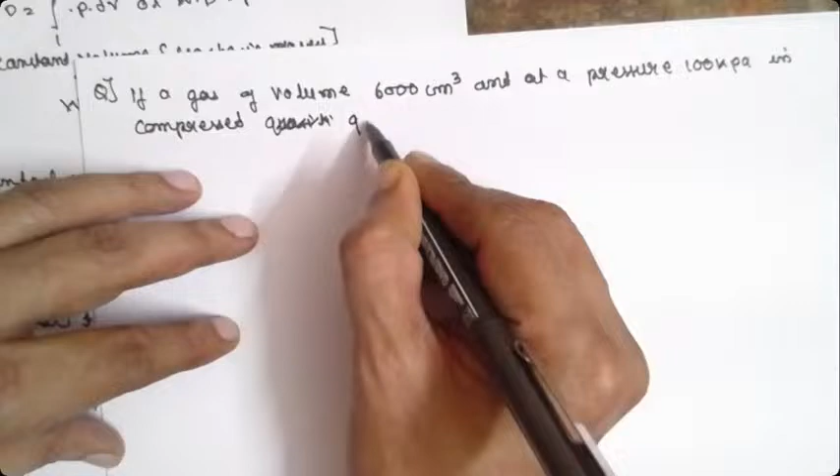If a gas of volume 6000 centimeter cube at a pressure of 100 kilopascal is compressed quasi-statically, it is the name of the process.

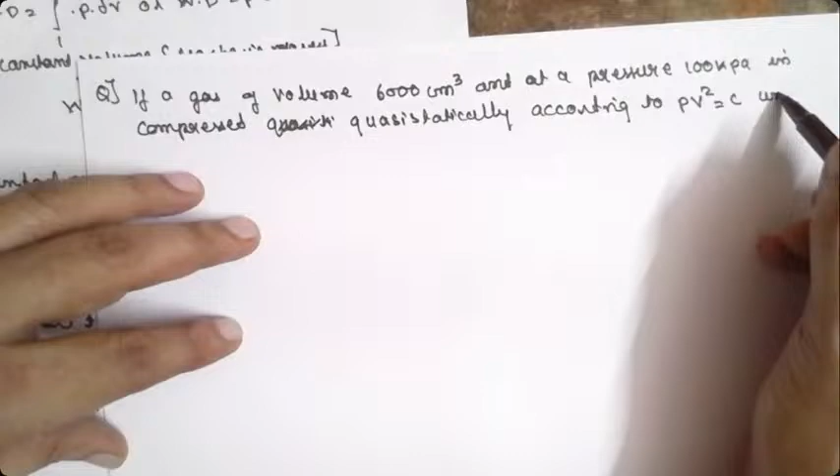According to PV square is equal to C, until the volume becomes 2000 centimeter cube.

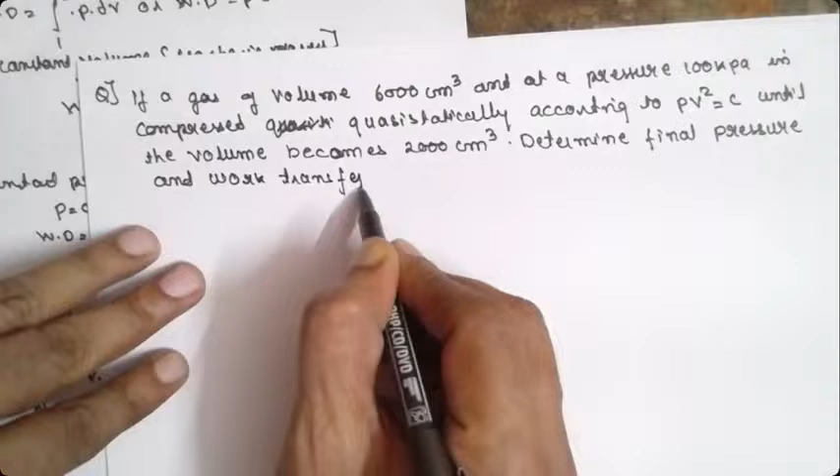Determine final pressure and work transfer. This is from July August 2022, for 6 marks. Now, based upon the overview of the problem...

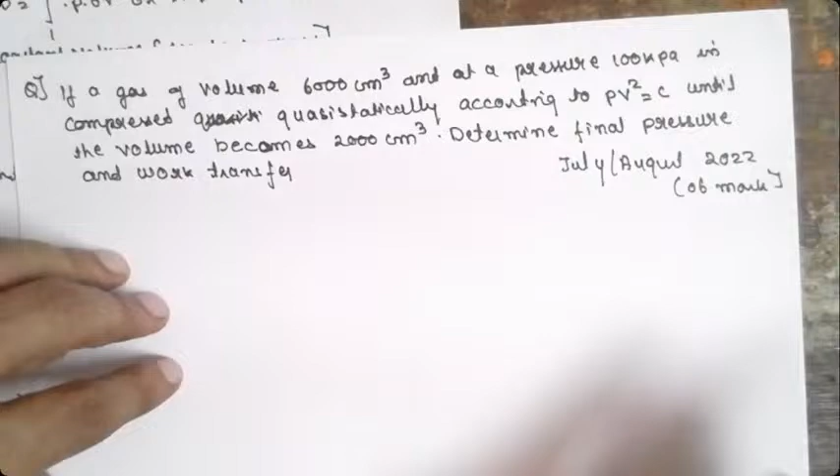Which process does this indicate? If it is PV square is equal to C, does it indicate constant pressure, constant volume, constant temperature, polytropic or adiabatic process? It is polytropic. This indicates a polytropic process.

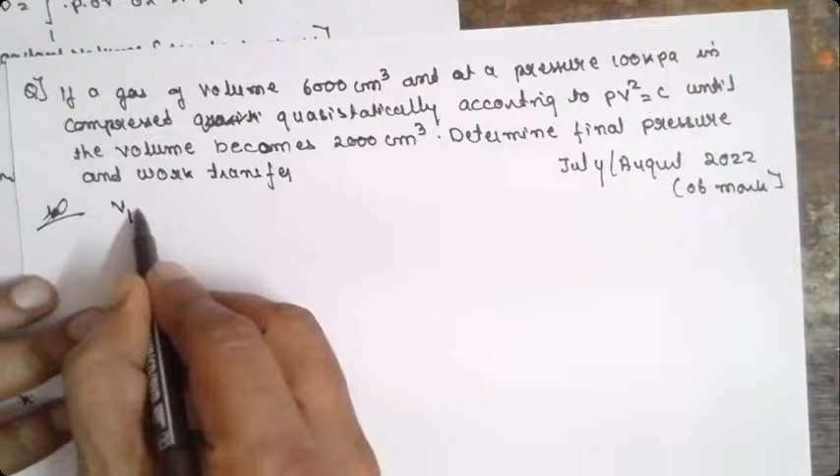Next, the volumes are given in centimeter cube, convert them to meter cube. It is a polytropic process based on this. Here V1 is 6000 centimeter cube, which has to be converted to meter cube.

So we go for 6000 into 10 raised to minus 6, converting centimeter cube, giving 0.006 meter cube. Next, V2 is 2000 centimeter cube multiplied by 10 raised to minus 6, which becomes 0.002 meter cube.

And the pressure given is P1, which is 100 kilopascal. That means they have given the P1 value. We need to determine the P2 value.

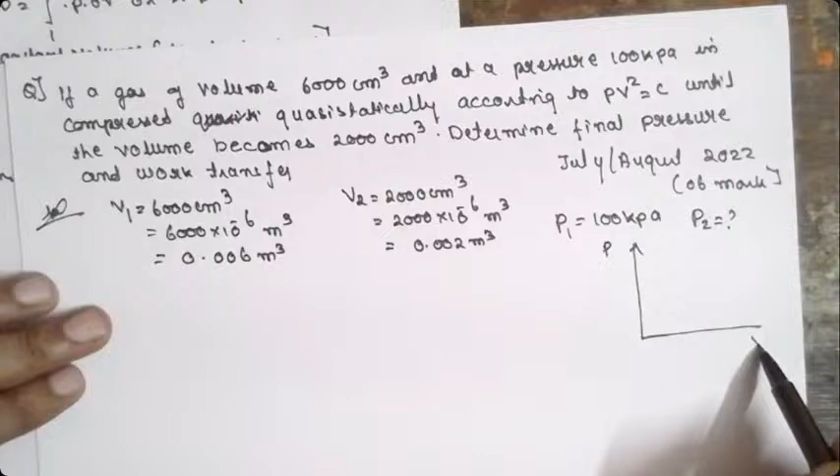It is a polytropic process. The PV diagram for a polytropic process will look like this, with points 1 and 2. PV square is equal to C. Now we need to find the pressure P2.

From the polytropic process, we know that PV^n is equal to C. It is similar to P1 V1 square is equal to P2 V2 square, equal to C.

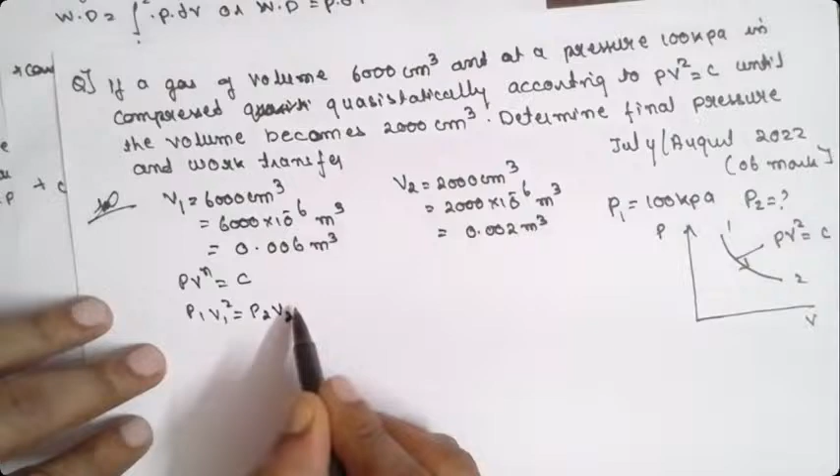Now we need to find the P2 value. We can write P1 (V1 divided by V2) whole square is equal to P2. Substitute the values: P1 is 100, V1 is 0.006, and V2 is 0.002, whole square, is equal to P2.

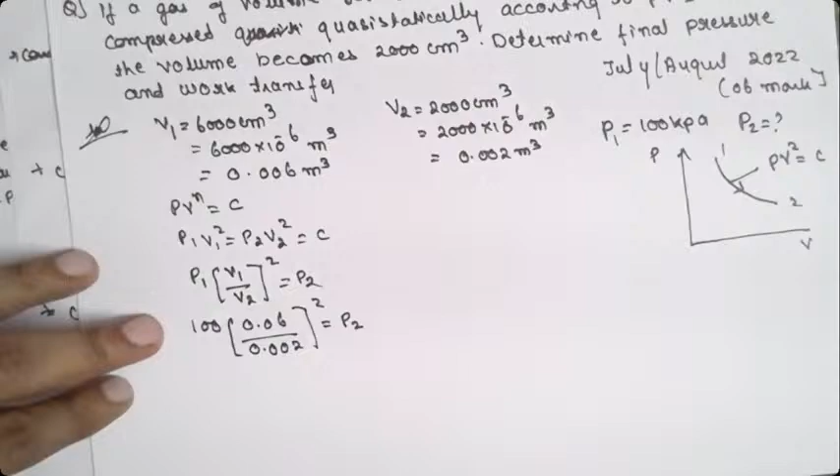Now 100 into 0.006 divided by 0.002, bracket close, square. The answer is 900. The P2 value is 900 kilopascal. We have determined the final pressure.

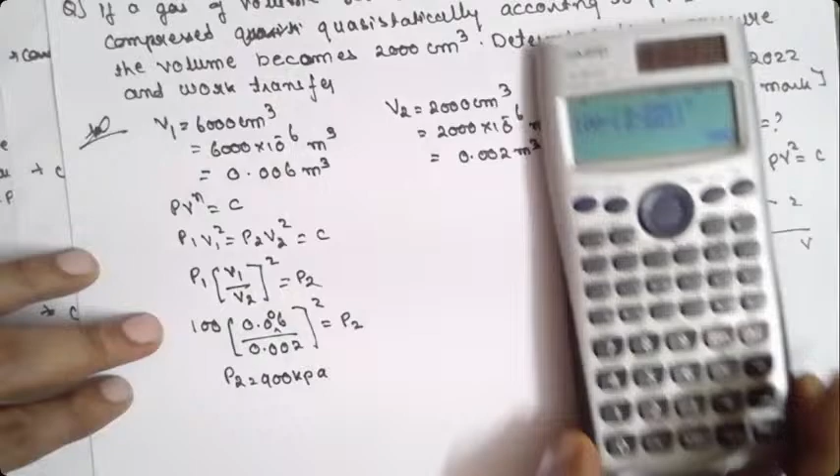We need to find the work transfer. What is the formula for work transfer in case of a polytropic process? Can anyone tell? W is equal to P1 V1 minus P2 V2 divided by n minus 1.

Excellent, n minus 1. Now what is the value of n here? The value for n will be 2. Substitute and you will get the work done.

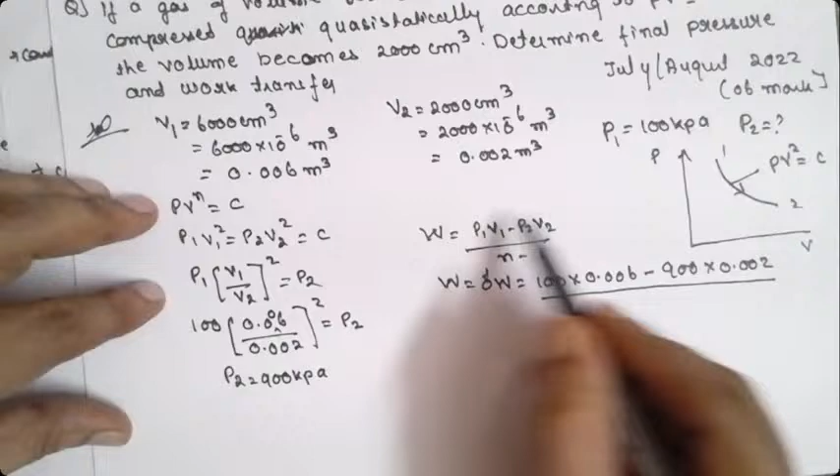Substitute: 100 into volume 0.006, P2 is 900, V2 is 0.002, divided by n minus 1, which is 2 minus 1. Now substitute: 100 into 0.006 minus 900 into 0.002, divided by 2 minus 1.

The answer is W, or delta W, is equal to minus 1.2 kilojoule. Here minus indicates heat is absorbed by the system.

Negative indicates work absorbing system, not the heat - it is a work absorbing system. Negative indicates the work absorbing system.

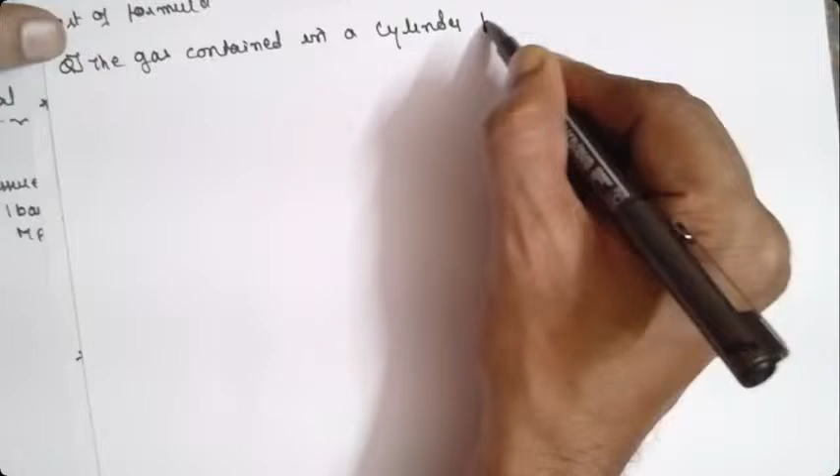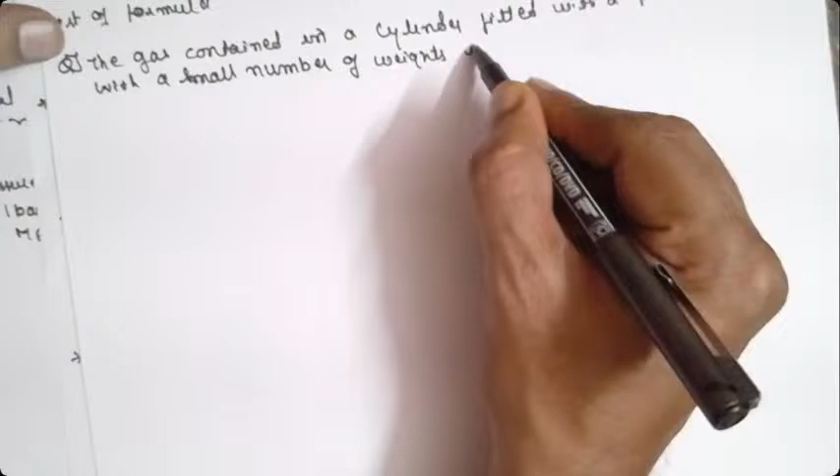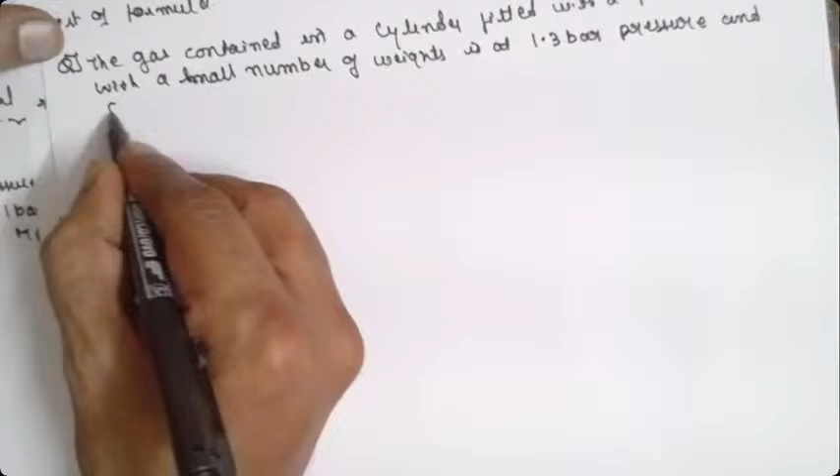The gas contained in a cylinder fitted with a piston loaded with a small number of weights is at 1.3 bar pressure and 0.03 meter cube volume.

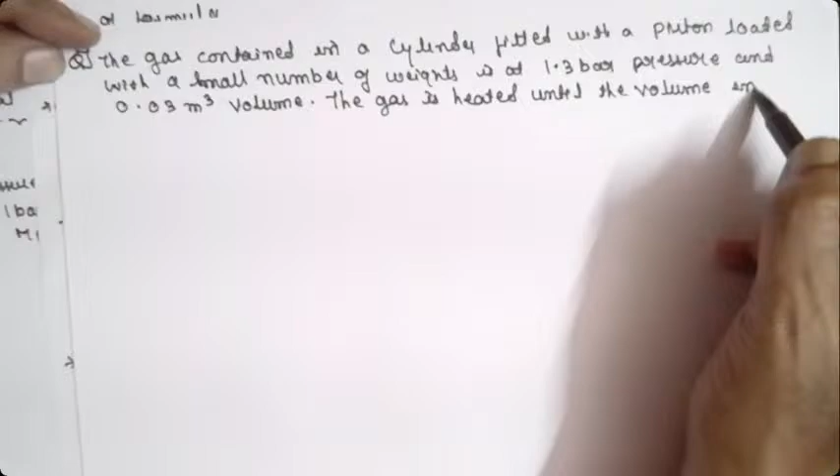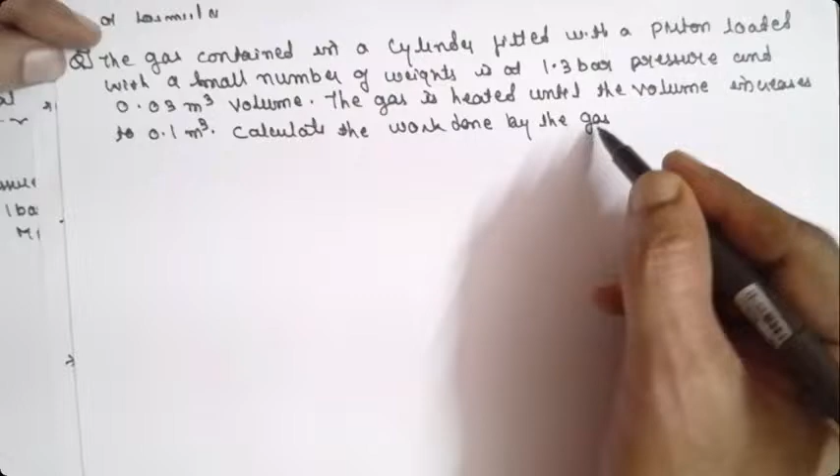The gas is heated until the volume increases to 0.1 meter cube. Calculate the work done by the gas in the following process.

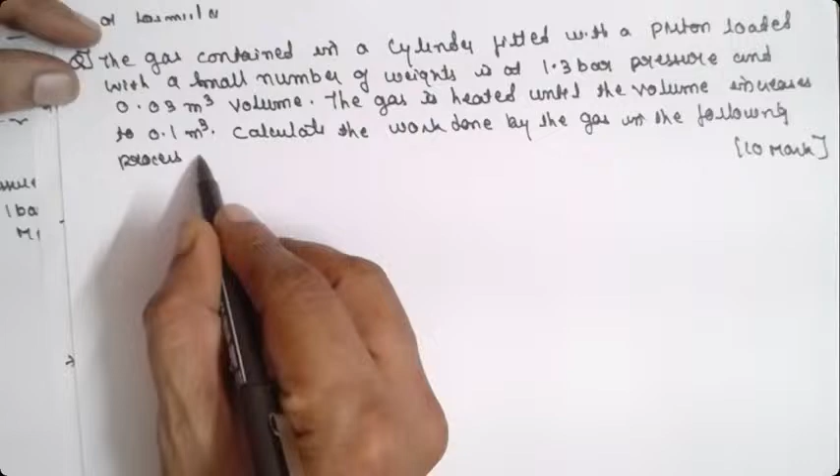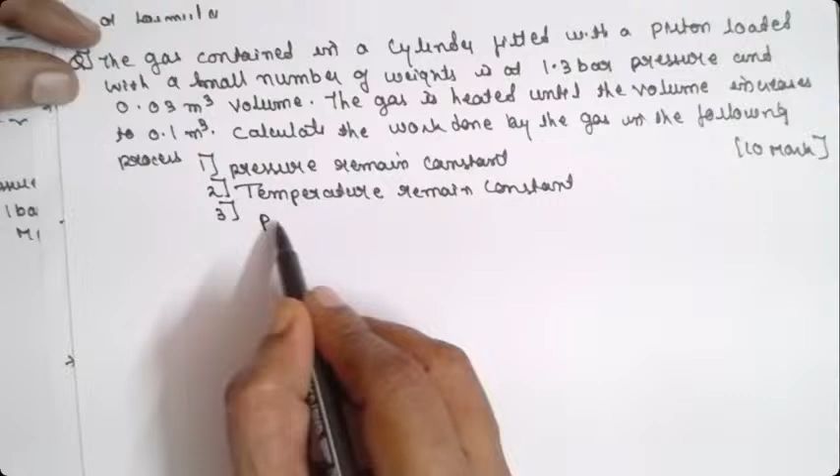This is for 10 marks. First, when the pressure remains constant. Second, when the temperature remains constant. Third, when PV raised to 1.3 is equal to C during the process.

During the process, we have to find out the work done with respect to pressure remains constant, temperature remains constant, and PV raised to 1.3 is equal to C.

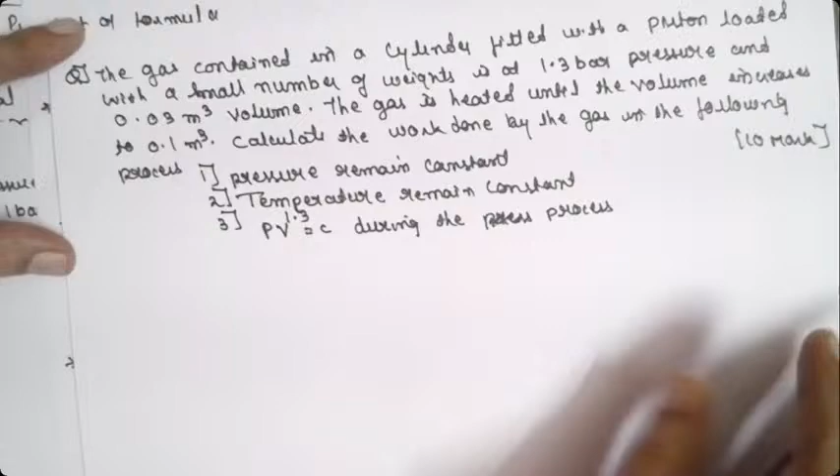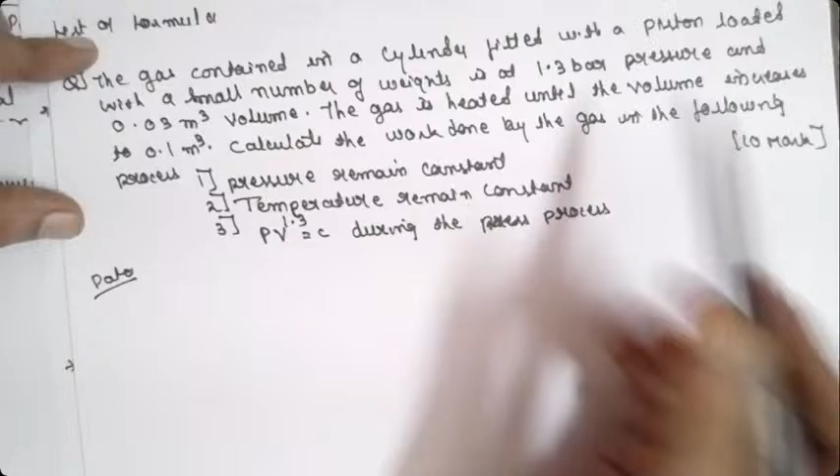Given data: the gas contained in a cylinder fitted with a piston loaded with a small weight. Here 1.3 bar, that means the pressure given is P1 equal to 1.3 bar. It has to be converted into kilopascal. Therefore, 1.3 into 10 raised to 5 Pascal, further 1.3 into 10 raised to 2 into 10 raised to 3 Pascal. This 10 raised to 3 becomes kilopascal, written as K.

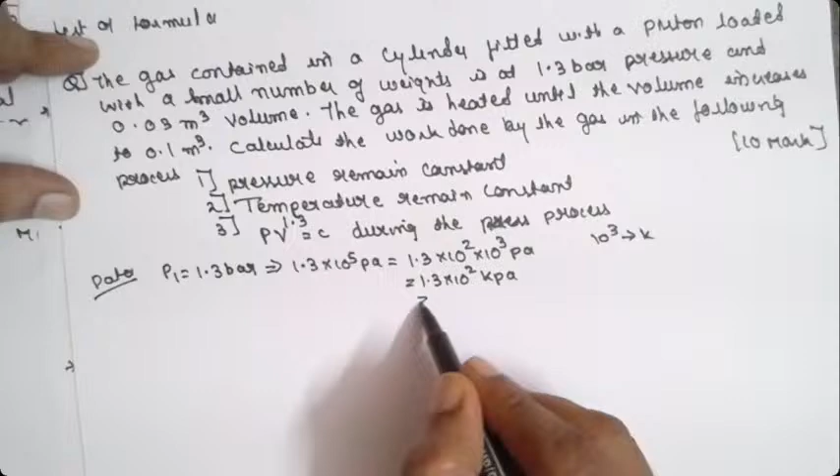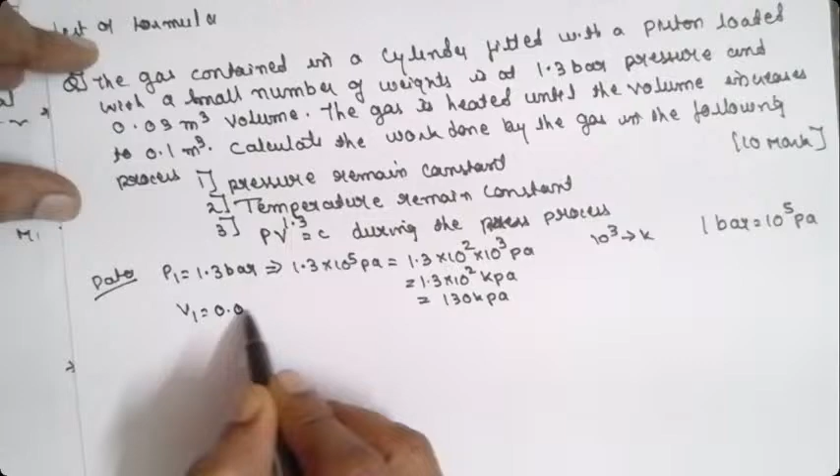We need to convert pressure in terms of kilopascal. It can be written as 130 kilopascal, because 1 bar is nothing but 10 raised to 5 Pascal. Next, volume V1 is given as 0.03 meter cube. The gas is heated until the volume increases, V2 is given as 0.1 meter cube.

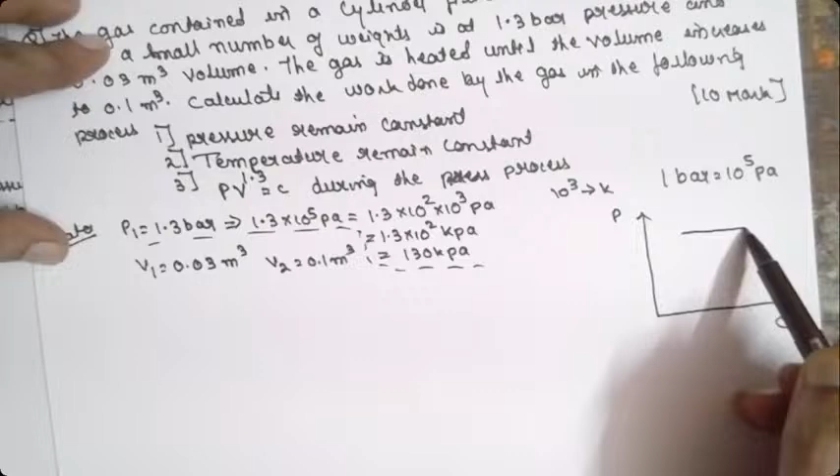We need to calculate work done for the case where pressure remains constant. Let's go for a PV diagram. First condition, the pressure remains constant, the line will be in this way. We call this P is equal to C.

Next is temperature remains constant, the line will be in this way. Here we call this PV is equal to C. Next, polytropic process, the diagram will be in this way. Here PV raised to N is equal to C.

Now we need to find out the work done with respect to pressure remaining constant. Can anyone tell the formula? Work done for pressure remains constant is P into bracket V2 minus V1. Excellent, V2 minus V1.

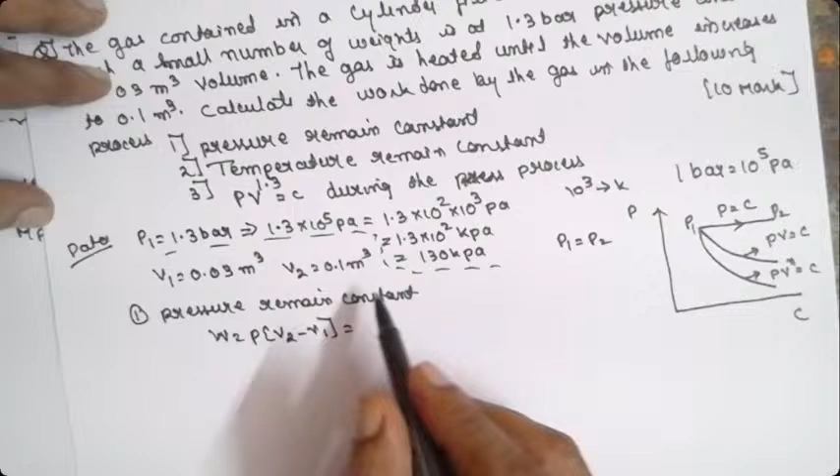Here P1 and P2 remain the same, P1 is equal to P2. Now substitute here: P1 value 130 into V2 which is 0.1 minus V1 which is 0.03. If you calculate, the answer is 130 into 0.1 minus 0.03, which gives 9.1 kilojoule.

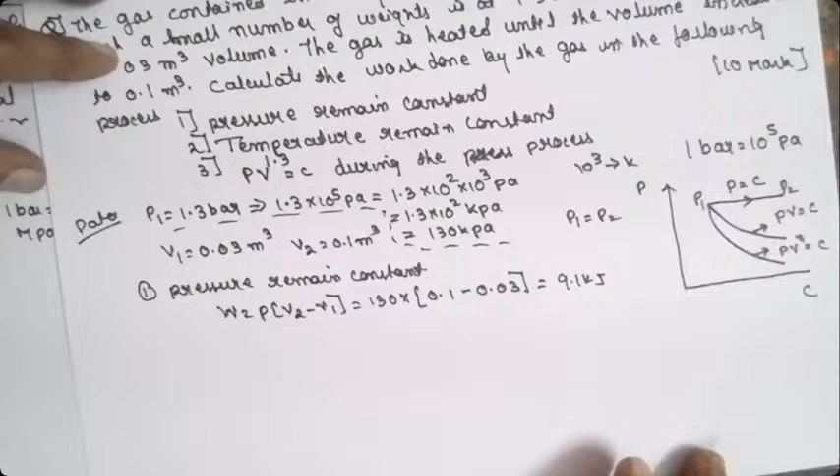Next we have to go for temperature remains constant. Can anyone tell the formula for temperature remains constant?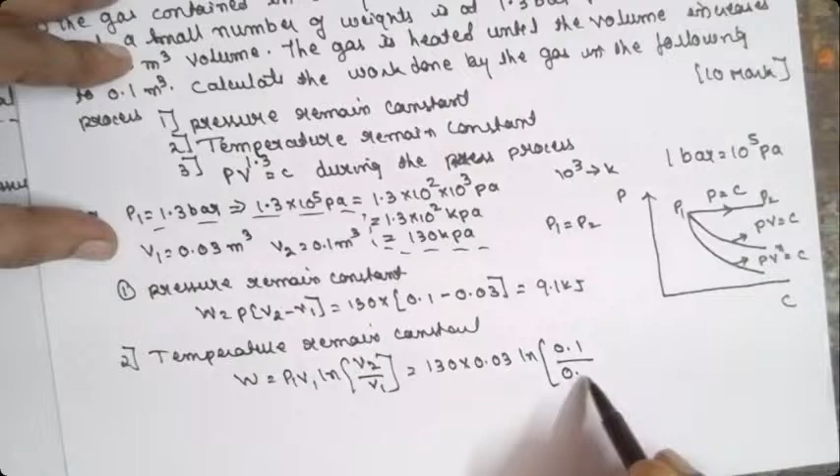The formula is P2 V2 ln P1 divided by P2, or P1 V1 ln V2 divided by V1. Excellent, now substitute here: P1 value will be 130, V1 value will be 0.03, ln of V2 which is 0.1 divided by V1 which is 0.03. Substitute it and you get the answer: 130 into 0.03 into ln of 0.1 divided by 0.03, close the bracket, the answer is 4.69 kilojoule.

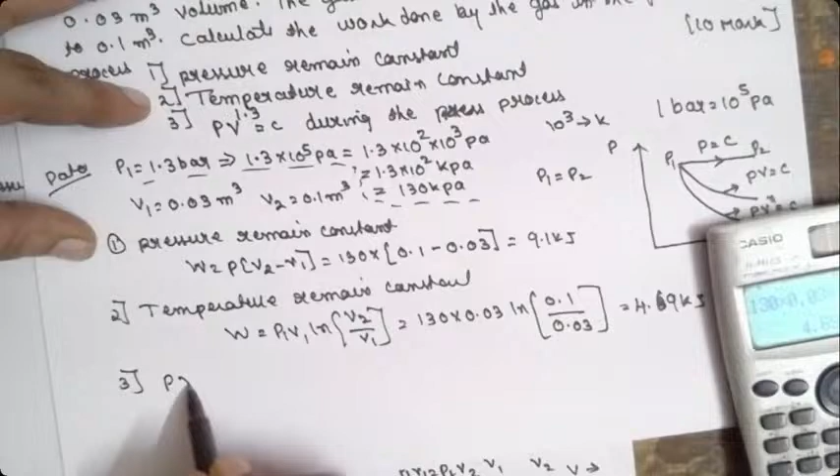Now polytropic process, the last one. Here PV raised to 1.3 is equal to C. The formula will be W is equal to P1 V1 minus P2 V2 divided by N minus 1.

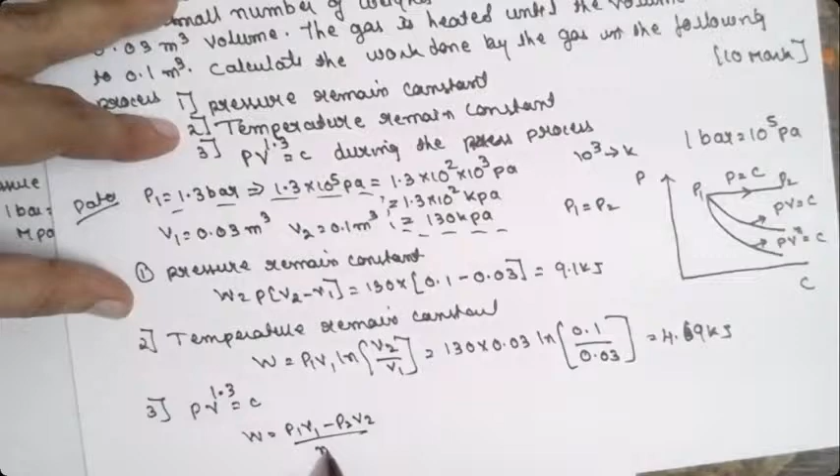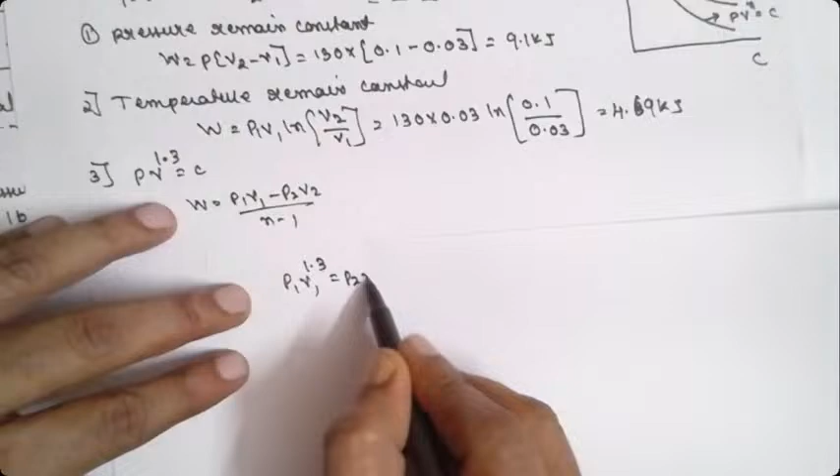We need to find out the P2 value. How do we find out P2? P1 into V1 divided by V2 whole raised to power. Since P1 V1 raised to 1.3 is equal to P2 V2 raised to 1.3, we get P1 into V1 divided by V2 whole raised to 1.3 is equal to P2.

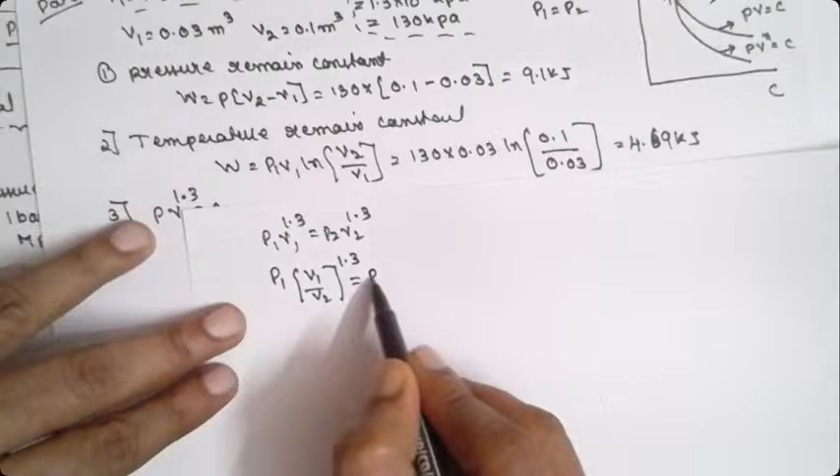Further substitute the value for P1, it is 130, V1 is 0.03 divided by V2 0.1, raised to 1.3, is equal to P2. If you calculate, you will get P2 value: 130 into 0.03 divided by 0.1 raised to 1.3. The answer is P2 is equal to 27.17 kilopascal.

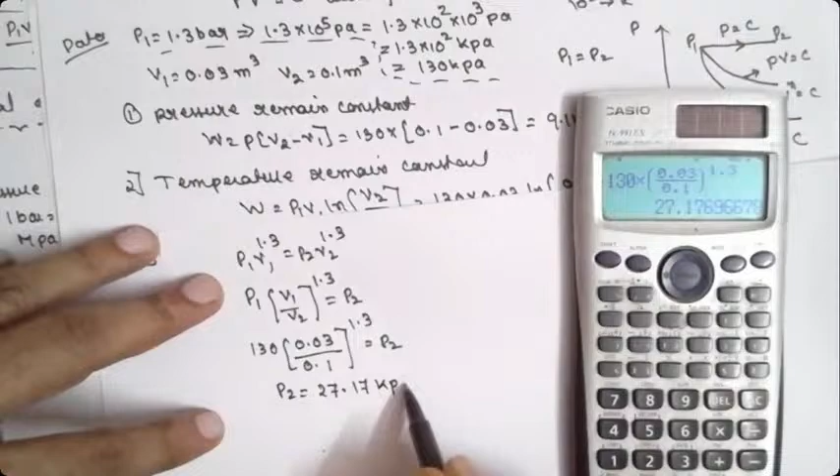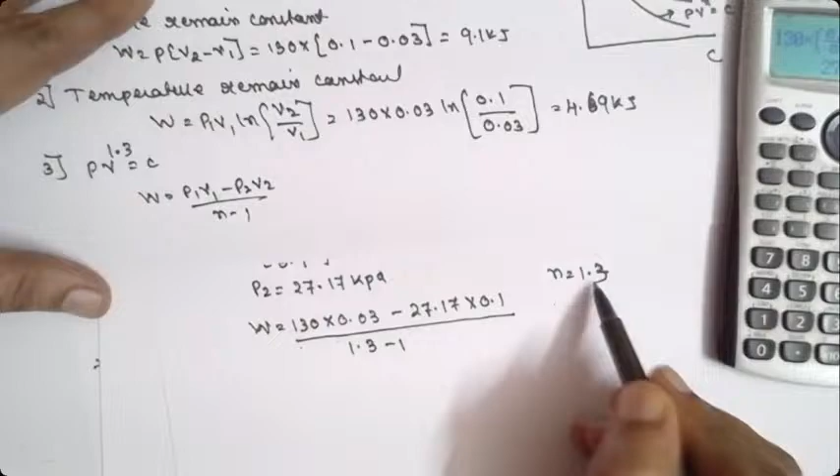Now after getting the P2 value, substitute in this formula: W is equal to P1 which is 130 into V1 which is 0.03, minus P2 which is 27.17 into V2 which is 0.1, divided by N value which is 1.3 minus 1. Calculate and you get the answer: 130 into 0.03 minus 27.17 into 0.1, divided by 1.3 minus 1. The answer is work done equals 3.94 kilojoule.

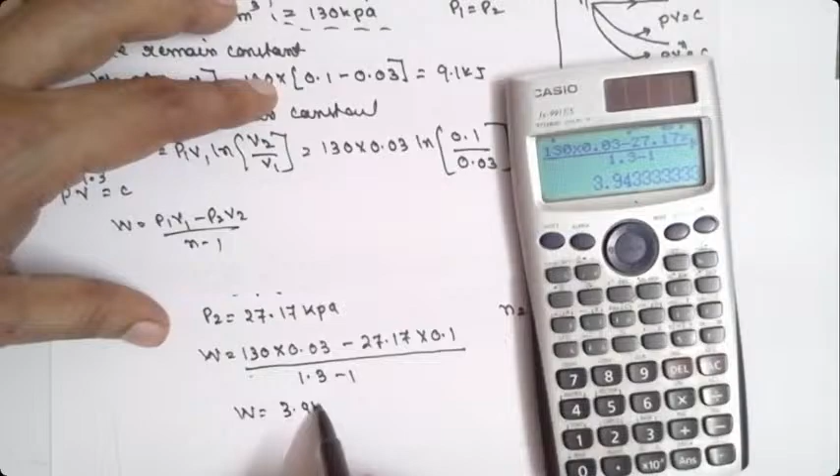Now there is a question here: if the volume remains constant, what is the work done? Can anyone tell? The answer is 0. Excellent answer. For constant volume, the work done will be 0.

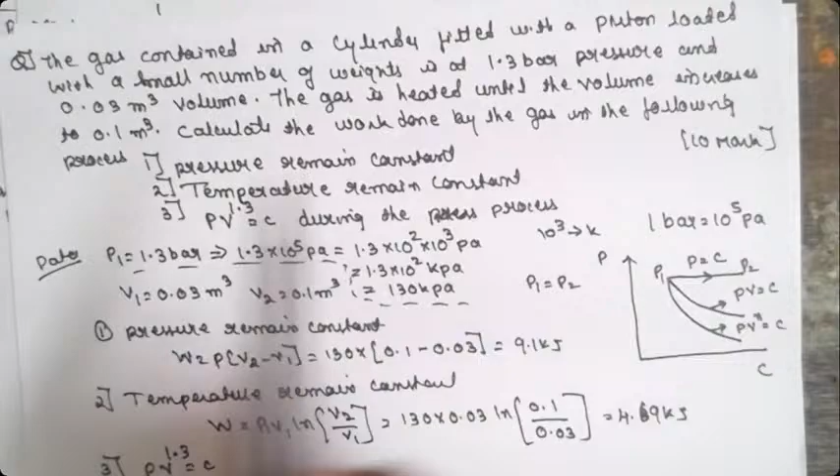I have given the list of formulas here. This is a list of formula. For constant volume, the work done will be 0. For pressure, the formula is there. For temperature, formula is there. Adiabatic is there, polytropic is there. For constant volume, the work done will be 0.

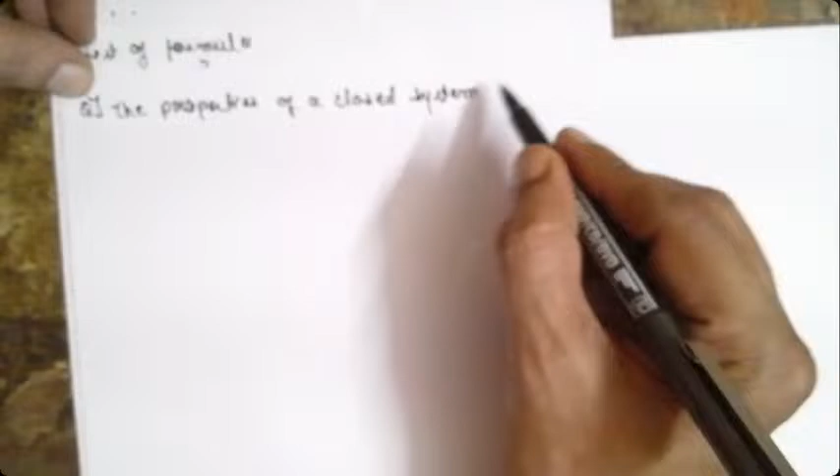The properties of a closed system change following the relation.

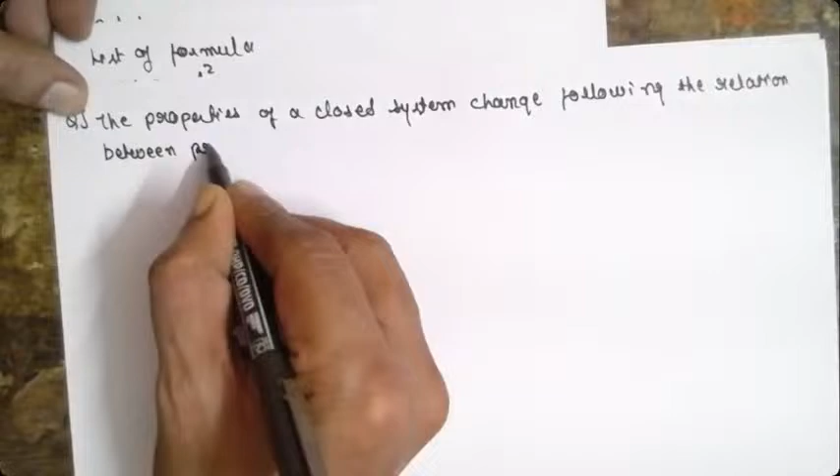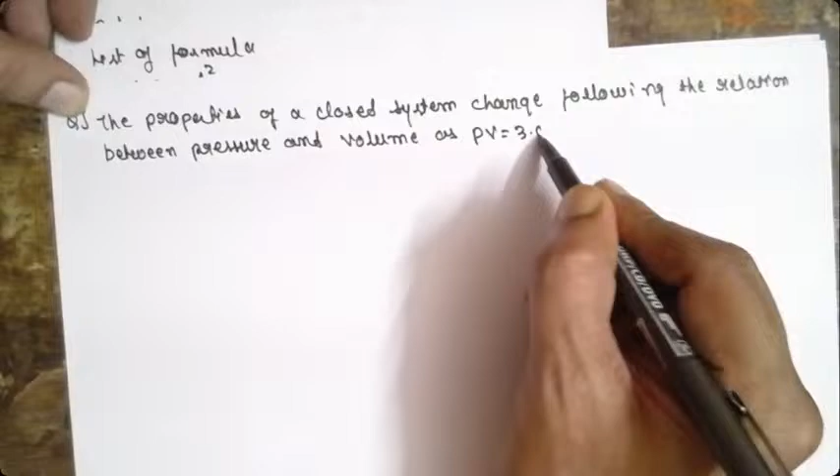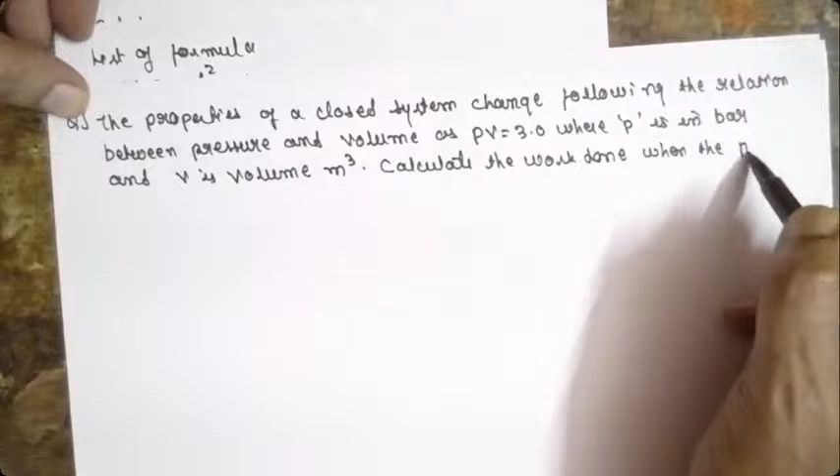The relation between pressure and volume as PV equal to 3, where P is in bar and volume V is in meter cube. Calculate the work done when the pressure increases from 1.5 bar to 7.5 bar.

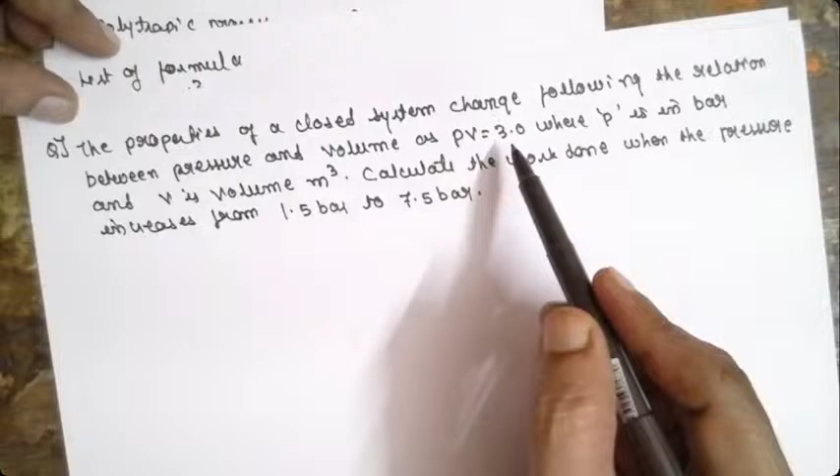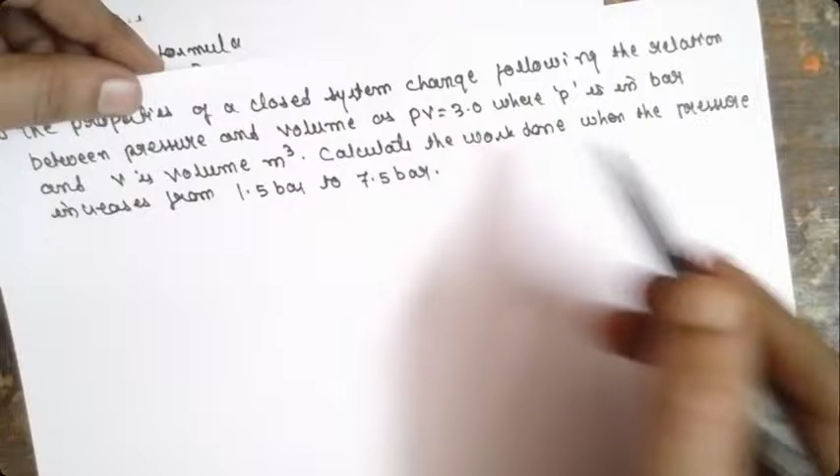Now this is the list. Temperature constant. When temperature remains constant, this will be the PV is equal to C. Go for a PV diagram. PV is equal to C, that means when temperature remains constant, we are going to use this.

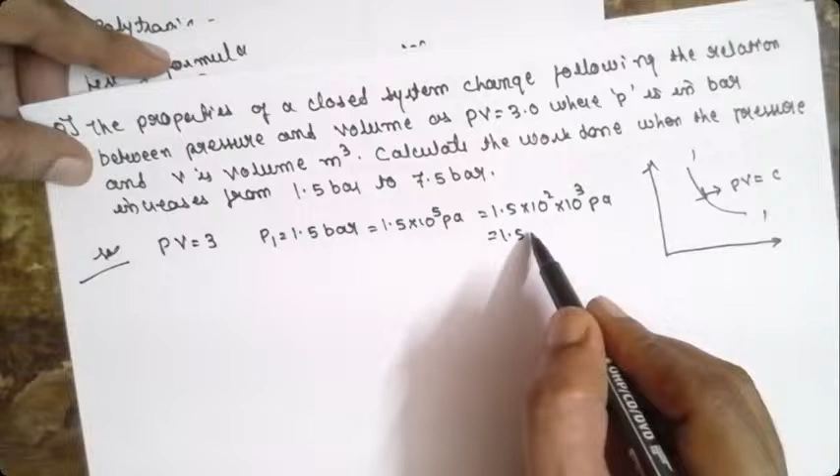Now solution. PV is equal to 3, they have given it, bar they have given it. P1 is equal to 1.5 bar, that means 1.5 into 10 raised to 5 Pascal, which is 1.5 into 10 raised to 2 into 10 raised to 3 Pascal, that is 1.5 into 10 raised to 2 kilopascal.

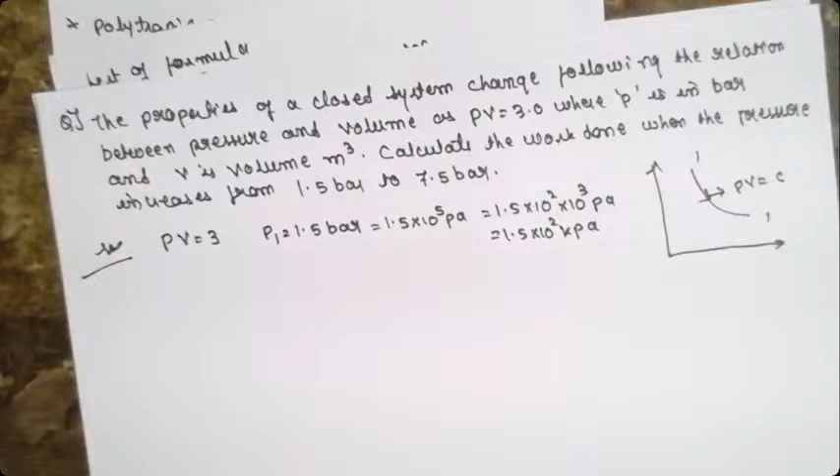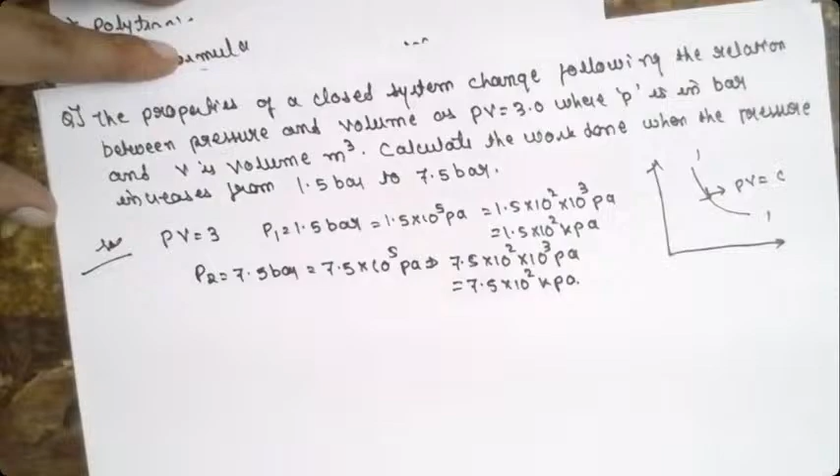Next, P2 is equal to 7.5 bar, that is 7.5 into 10 raised to 5 Pascal, or 7.5 into 10 raised to 2 into 10 raised to 3 Pascal, that is 7.5 into 10 raised to 2 kilopascal. We need to find out the work done.

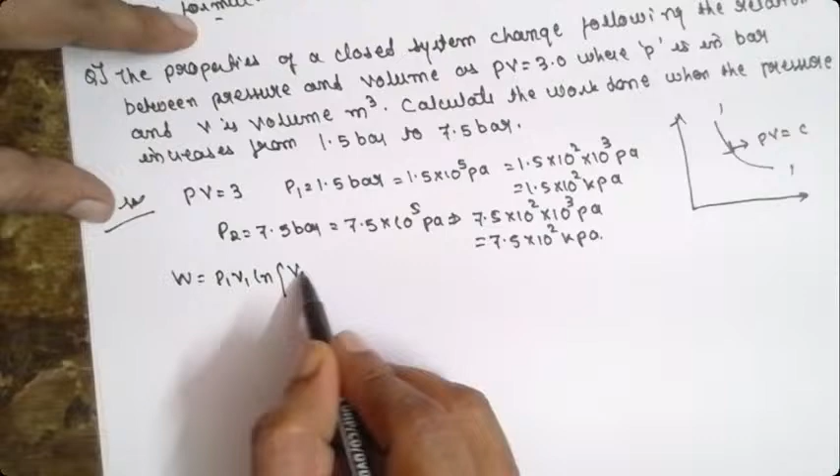Now see here, the formula for when temperature remains constant: W is equal to P1 V1 ln(V2 divided by V1). This is the formula for finding the work done when the pressure increases. Now direct substitute in the formula, you will get the work done. Now we need to find out the V2 value.

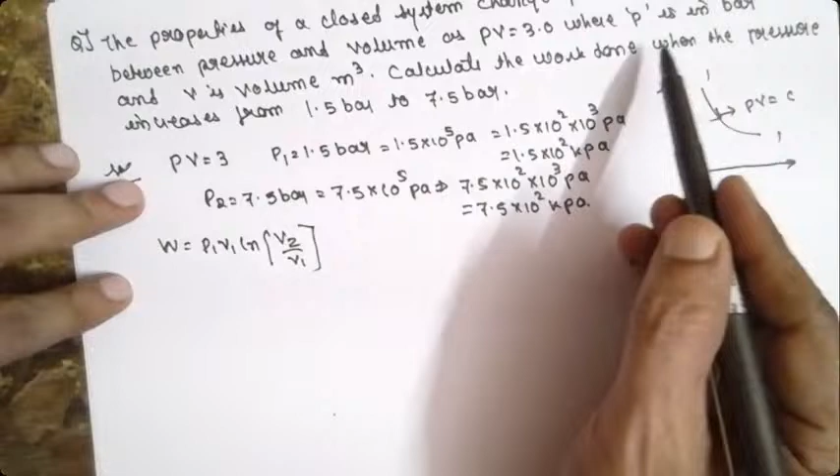They have given volume - volume is not given directly, we need to find out the volumes here. Now see here how to find out volume, by using this concept.

P1 V1 is equal to 3. P1 we know, P1 is 1.5 into 10 raised to 2. So V1 is equal to 3 divided by 1.5 into 10 raised to 2. If you calculate,

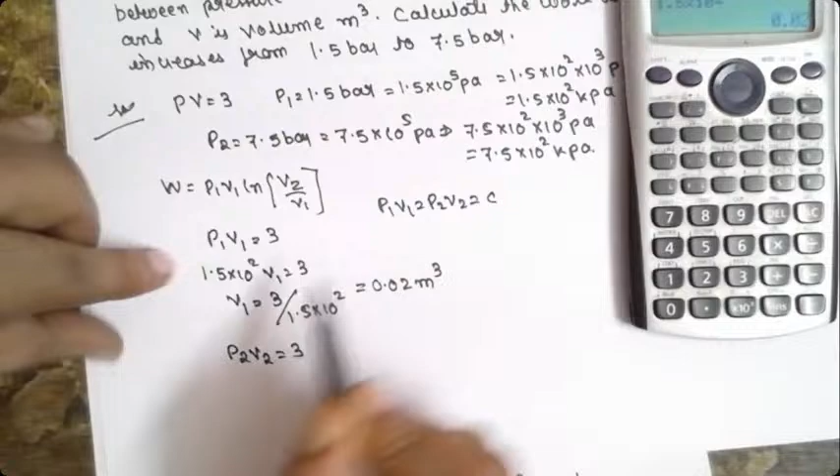The volume will be 0.02 meter cube. We got V1 value. We need to find out V2 value. Now same here, P2 V2 is equal to 3. We know that P1V1 is equal to P2V2 is equal to C. Now P2, we know the P2 value 750, or you can write 7.5 into 10 raised to 2. We don't know V2, so V2 is equal to 3 divided by 7.5 into 10 raised to 2.

Calculate 3 divided by 7.5 into 10 raised to 2. Answer is 4 into 10 raised to minus 3 meter cube.

We got the volume V1 and V2. Substitute in this formula, you will get work done. Work done: P1 value is known, 150 or 1.5 into 10 raised to 2. Ln of V2 value, 4 into 10 raised to minus 3, divided by V1, 0.02.

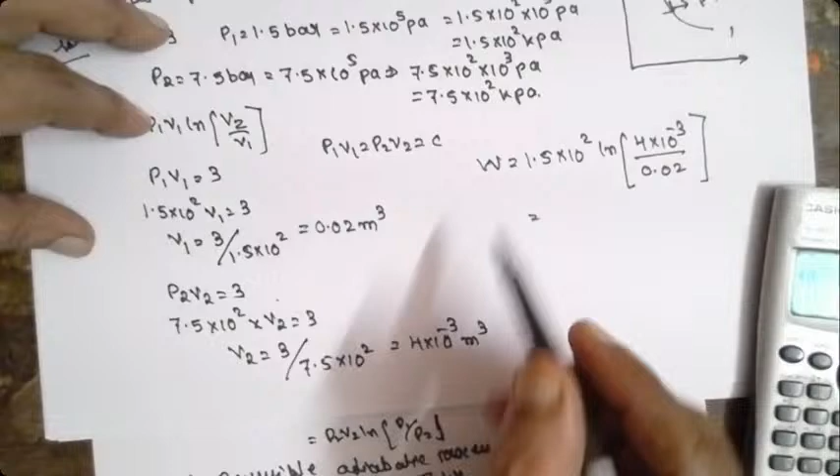V1 is 0.02, into 0.02. Answer is minus 4.82 kilojoule.

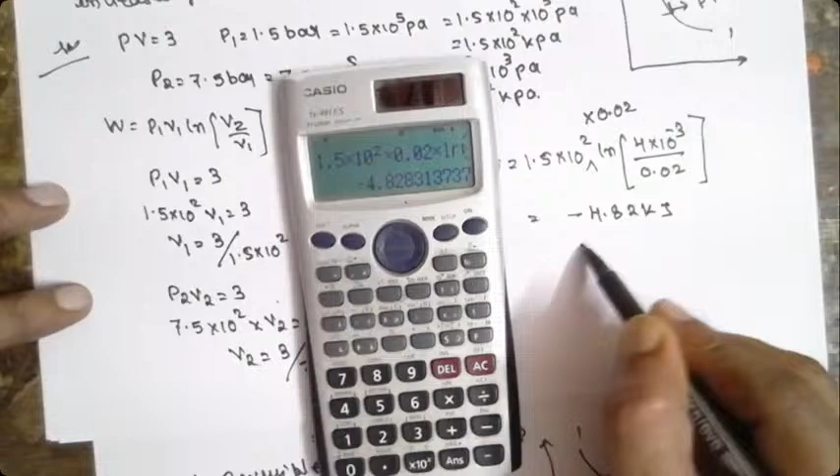Minus indicates the work absorbing system.